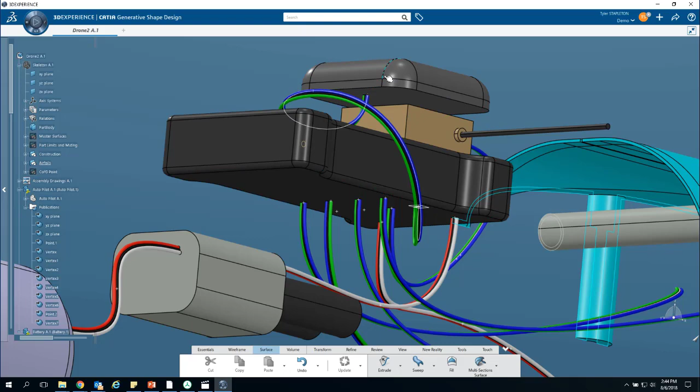Now I'm going to reuse the sample drone that we've used in previous videos. In this video, however, I've hidden a couple of the major components involved in the fuselage, including the fuselage body and the canopy section here at the front of the drone. I've also taken a section view of that left side, which is going to allow us to see a little bit more clearly whether or not these wires are actually clashing with that canopy piece that's covering it.

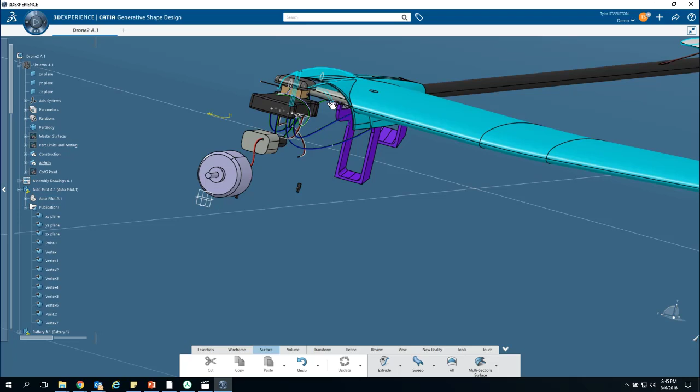But we're going to go ahead and get started without the canopy so that you can see my process here. So let's take a look at how this wire was created.

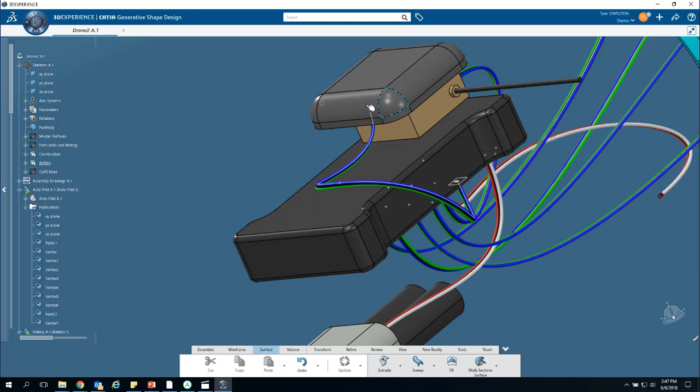This wire consists of a spline that's moving through a handful of points, moving from the microcontroller on the underside there, up and over, and then up into the GPS unit, and a profile, which we can actually see from the back here, that defines the actual shape of the wiring.

Now we need to recreate this wire, so first things first, I need to come in here and delete it. I'm going to do that by simply deleting this spline. It's going to ask if I want to delete all children, which is essentially everything that relies on that spline for its definition. I'm going to go ahead and do that, say OK, and that's going to delete the wire as well as the profile.

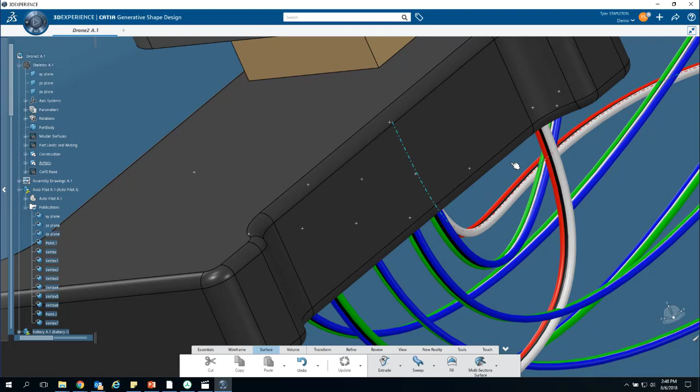Now the spline was defined by 3 points, and we can look at those now. Those 3 points consist of one drawn on the underside of this microcontroller, one on the underside of the GPS unit, and one in space that's defining a certain point to make sure the wire goes over the edge of this Pixhawk. Now this one, if I double click on that, we can see it's simply defined as a set of coordinates in space.

And for defining a spline for wiring, that's actually the best method, because this is going to allow me to move this point as much as I need so that I can get that spline exactly how I want it and make sure it passes properly over the microcontroller.

Now you could also define a spline with more than 3 points to give you a little bit better control of the path that it follows. But in this video, we're just going to work with these 3 because I want to show you how it's possible to do the same process with only 3 points.

So for that point, that's actually the position I wanted in. So I'm just going to leave it at those coordinates.

Now the other 2 points that are placed on here are actually part of the definition of each of these individual parts. If I come over here and look in my tree, I can actually find there's the autopilot, and these points are defined as part of the geometry of that autopilot.

I can look in the part model here and we see there's an individual point back here, and that point is then duplicated using a symmetry over to this point here, and then there's a second point, this one back here, that they repeated using a rectangular pattern.

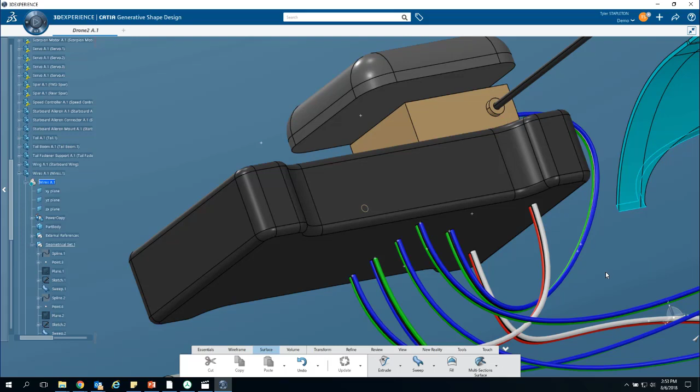I'm using this geometry as a representation of where the wires could go, and to ensure that there's enough space in my model to thread those wires through the parts. You'll notice one of these wires actually passes all the way back into my wing here, and I need to make sure there's enough space for that to go all the way back to that servo.

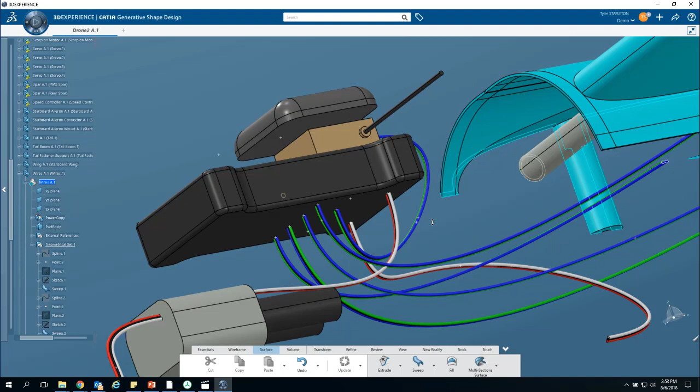Since I don't actually need to create an individual drawing for any of these wires, it's okay for me to keep all of their geometry in one part, just to have a representation of where they could be. So I'm going to activate the geometry for that wires part, and make sure I'm in generative shape design. Because we're using a spline and passing a surface over that spline, generative shape design is the easiest way to go about this process.

Let's make that spline. I'm going to go into wireframe, select spline, and select those 3 points, going in kind of reverse order here, because I have some numbers written down that I'm going to use, which go in this order. That's going to define a quick spline.

Now, splines always take the shortest distance, with some allowance to minimize sharp points along that path. Notice it's going to come into both of these points from the top here with this autopilot point, and just from the side here on this one. We need to make sure they go straight up and down into both of these parts.

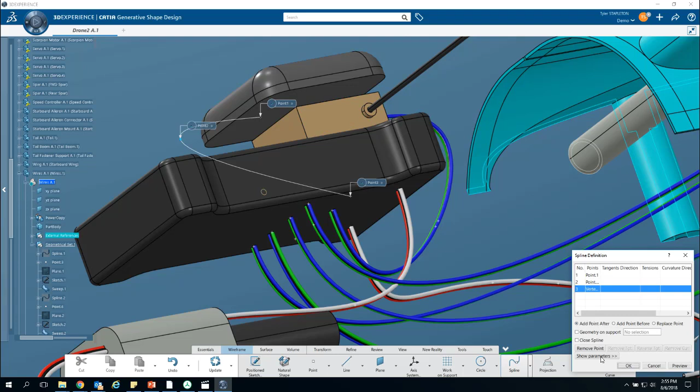To do that, I need to go to Show Parameters, and we need to add in tangent directions to both of these. I'm going to select that field down here on this menu, and use the XY plane, that horizontal plane there, and it's going to force that point to be normal to the XY plane, making sure it goes straight up and down at that point. That looks good right there.

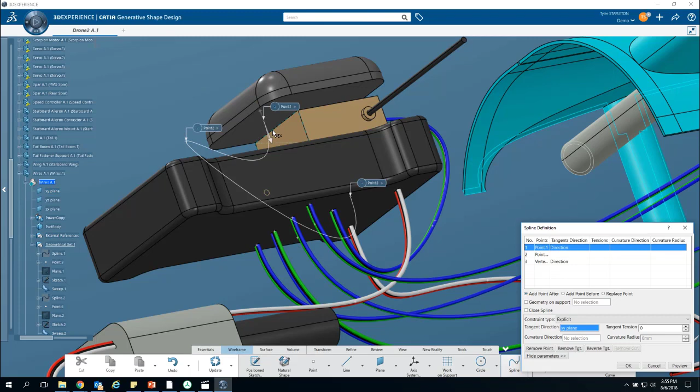I'm going to come up to point 1 and do the same thing, using the XY plane. Notice it is coming in from the top, so I'll click on this little arrow here to reverse that direction and force it to come down from the bottom. I'm actually going to add in a tangent direction on this point too.

This isn't entirely necessary in all cases, but what I'm going to use later in this video is the tangent tension to define the curvature of the spline at that point, which I can only do if I add a tangent direction. So I'm going to add that, using a ZX plane, and reverse that direction as well, forcing it to go kind of horizontal in this case and move down. We'll come back to the tangent tension and I'll show you what that means a little bit later.

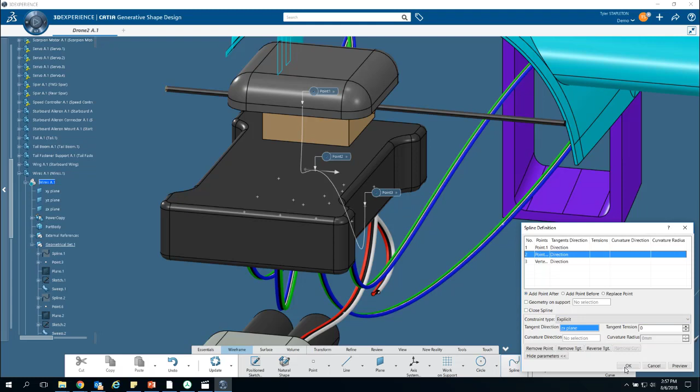Now we have our spline. It curves up, goes over the top of the autopilot, and then curves up into the GPS system up here. That looks pretty good, so let's move on to adding the actual wire profile.

I need to look at the bottom of this shape here. I can try to position the sketch directly on the surface, but I'm going to be a little more general, since in some cases that's not going to be an option. So I'll add a plane through this point, and change it to normal to curve. I have the point it's going through, and then it needs the curve, which is the spline itself. That's going to ensure the profile always stays normal, exactly perpendicular to this curve.

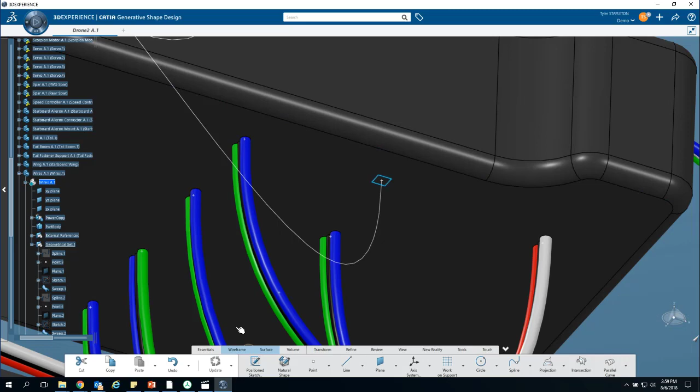I'll say OK, and put the sketch for that profile right on here. Now let's draw this. I'm just going to move these circles off to the side, and the reason I do this is to make sure I don't accidentally create any additional constraints. I'm purposefully putting them in to force them to be vertical to each other, but just like if I move it next to this top circle, it will make them tangent to each other, I don't want to accidentally force something to be defined relative to that point until I'm ready to do so.

I'll double click on constraint and add that diameter. Here's a nice little tool I haven't shown before: I'm working in millimeters in this case, but I actually have the measurements written down in inches. I can just write in inches as part of my definition, and it will automatically convert that into millimeters in my measurement system. So for each of these, I'm going to include that inches measure.

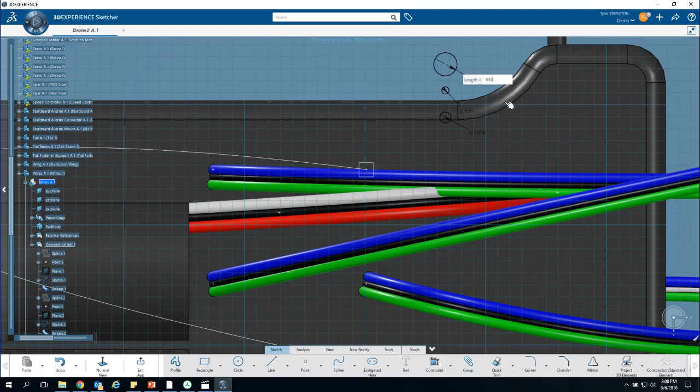Okay, then I need the distance between each of those. Let's zoom in. These are all forced to be vertical already, so this is going to know that I want the vertical distance between those 2 points, and this one as well.

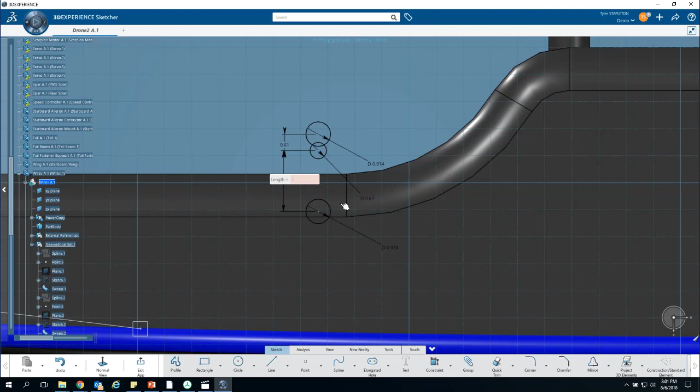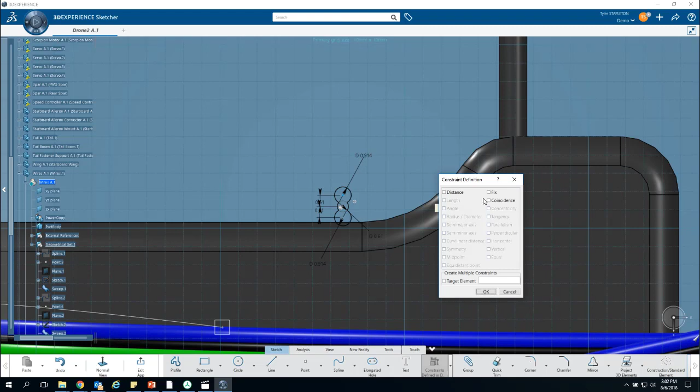Now I can just quick trim, remove those extra curves, and there's my profile for my actual wire. Now all I have to do is move it into place. So we're going to get off of that tool, select this point, hold Control, select that point, and I'm just going to force them to be coincident. And there we go.

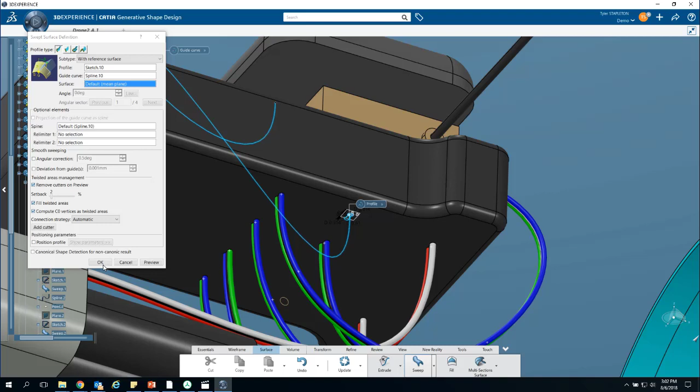Now I can exit that app, and we're ready to create our swept surface. So in Surface, I'm going to go to Sweep, and it's just going to take that profile. I need to select that spline as the guide curve, and that's all I really need to do. This is kind of a frightening dialog box, but we really only need those two selections made, and I can hit OK. And that has created that path for our wire.

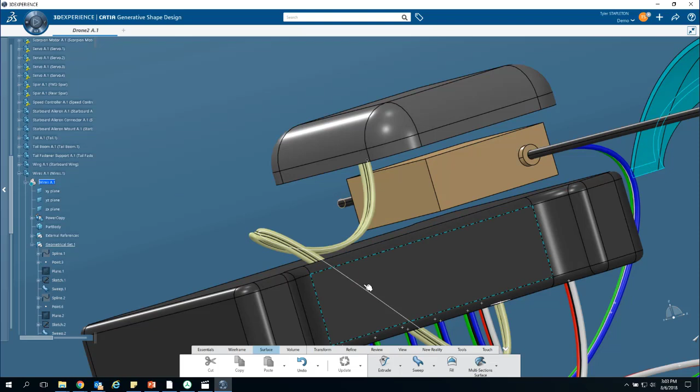Now obviously that's not what we want. It cuts into this wire here, and even more clearly cuts through the autopilot there. But I wanted to produce it first so we can actually see what changes when I add some tension to our spline.

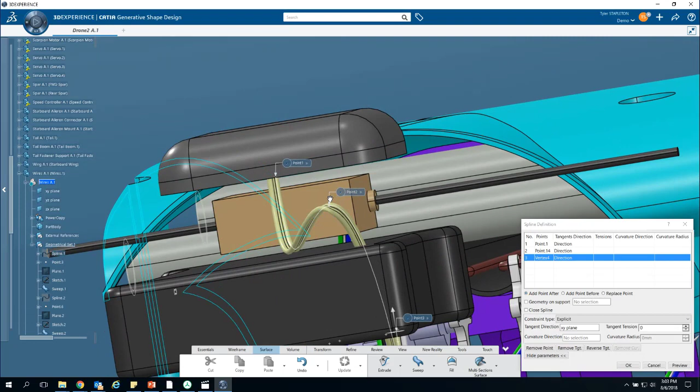So let's get back into the spline, and I'm going to show you how that process works with this tangent tension item here. Now again, that essentially defines how tightly it's allowed to curve at each of these points. By adding in some tension, we give the wire a little bit more stiffness so that, for instance, this little turn right here, we can define that to be a little bit smoother of a transition, not so tight of a curve there, because you can actually see here that that surface is kind of bending on itself right there.

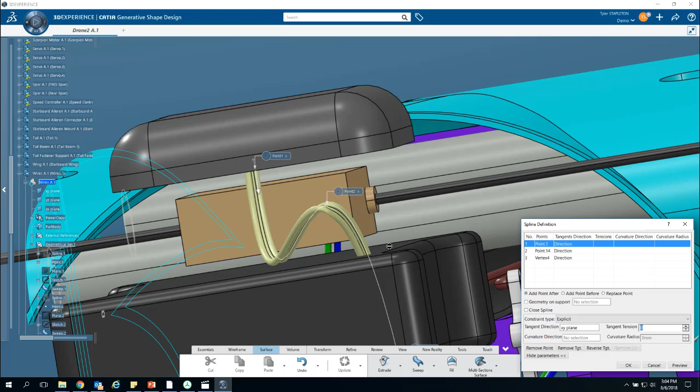So I'm going to go through, and again, I have these numbers in front of me, but you would want to experiment with these a little bit and kind of find what works for your case. Now this is just one method of defining how that spline moves. You're also welcome to add some additional points into your spline to make sure it has to pass around something like this autopilot before it can move up through this one.

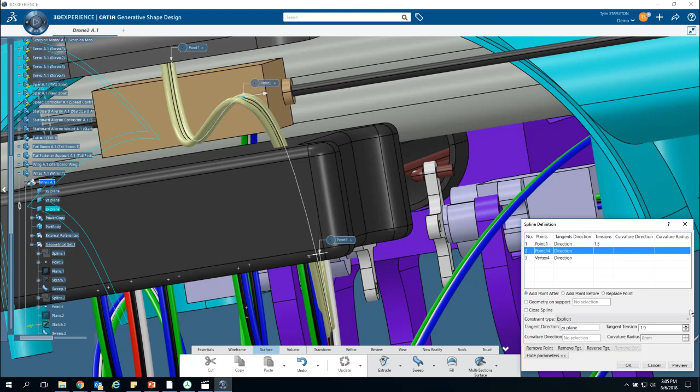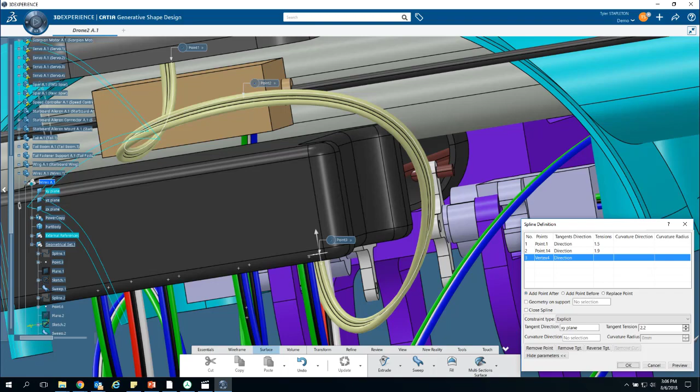So I'm just going to add each of these. So that is 1.5, 1.9, and now notice when I select past that one, it's going to jump out past, there it goes, jump out past that autopilot. That 1.9 forces it to jump past there because this is the sharpest that I'm allowing it to curve near that point, forcing it to jump out further. And this last one is 2.2. You can hit OK. That forces it to jump a little bit lower.

Now we can also see it's curving past that wire, not running into the wire. It's not running into my autopilot. And there's a little bit of maybe an awkward twist near the end here, but not one that's bad. And it goes straight up into that GPS.

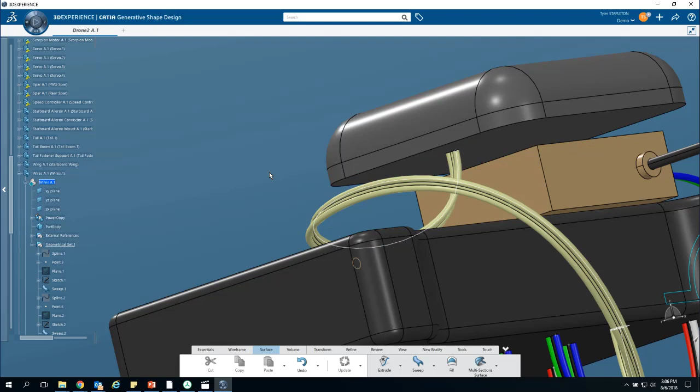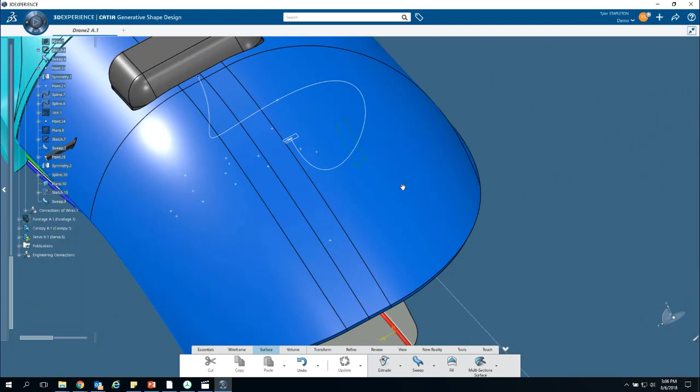And now I can even check it. If I jump back down here, I can unhide that canopy. Now there are holes cut for these antennae here, but now by kind of moving this around, I can look at the canopy as well and see that there is some clearance in that canopy, and I'm just fine. More importantly, I can look at the top here and see that none of that wire is visible up here because, again, this is just a representation of where the wires could go. That looks good, so I'm going to hide the canopy again.

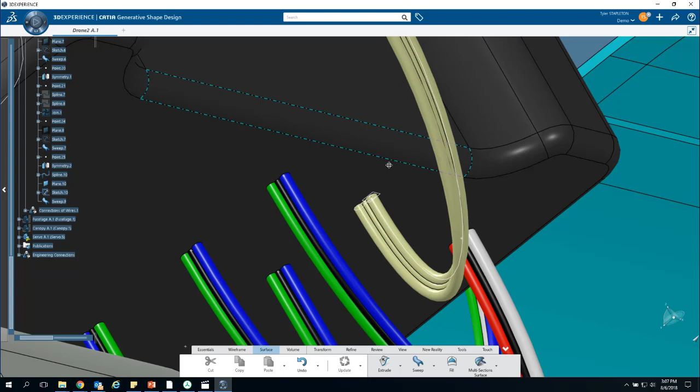Alright, now, last part of this process is making it look pretty like these other wires in here. And that's actually a pretty simple process. All I have to do is come in here and select each of these surfaces as part of my profile. And because there's a sharp corner right here, it's only grabbing this one part of the wire instead of the entire thing.

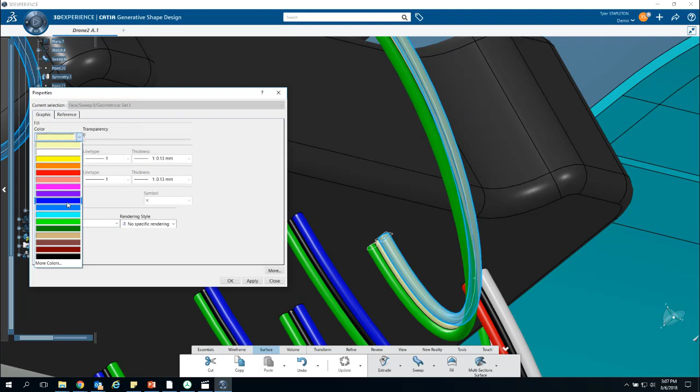I'm going to go to Properties, right-click, go to Properties, and then I can just change this color. There's a reference section and a graphic section. Change this color into what I want. So that one's going to be green. I can hit Apply or OK. Then I'm going to select this other side. We're going to make this one blue. There we go. OK. Now this middle section sometimes is a little bit touchy.

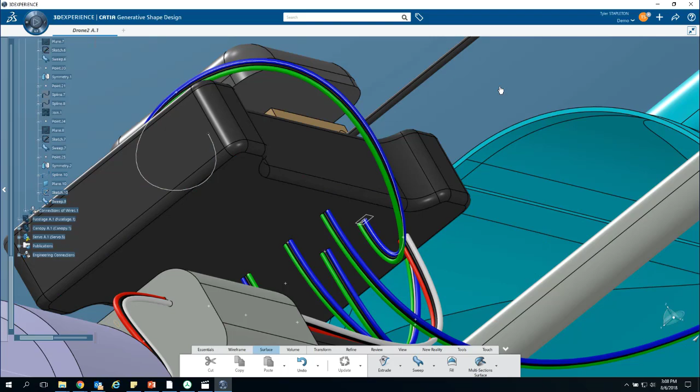And I could come back in and hide this spline and the points, which you notice the splines are hidden on each of these other wires right now. And that's the process. Thanks.